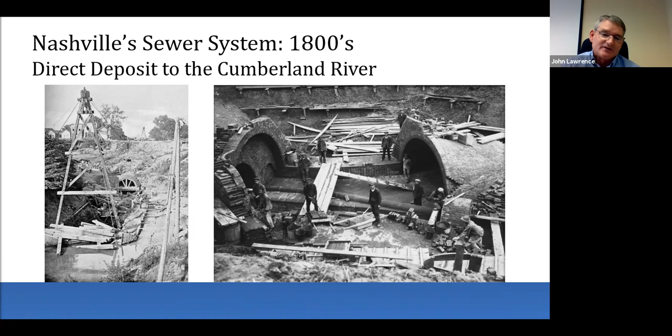Next slide, Jenn. Let's fast forward to 1948. The Federal Water Pollution Control Act was the foundation for the Clean Water Act in 1972. The authors of these acts recognized the urgency to protect our waterways and set wastewater standards across the country. That led to the National Pollutant Discharge Elimination System, which we refer to as the NPDES permit, that sets limits for the pollutants that are discharged to the waterways of the United States.

Central Water Reclamation Facility was built in 1958 and expanded several times to accommodate the growing population of Nashville. If you look around Central, you'll understand why, because there's townhouses and flats just going up all the way around the Central Reclamation Facility.

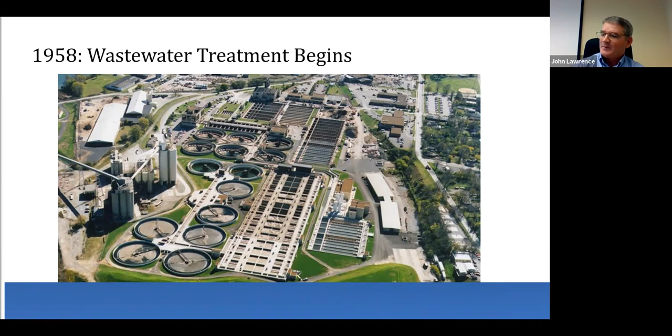Next slide, Jenn. Metro Water Services not only includes Davidson County, but also includes portions of Williamson, Wilson, Robertson, Rutherford, and Sumner counties. So you ask, how can Metro Water Services get wastewater from surrounding counties? Well, there are 118 sewer pumping stations. These lift stations are used for pumping wastewater from a lower to higher elevation. For example, we need to pump wastewater over a ridge to get it to flow by gravity to the treatment facility.

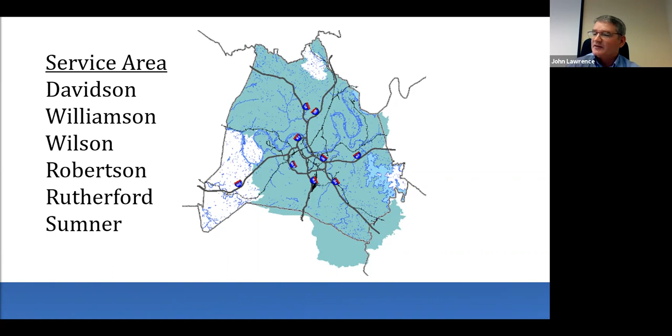Next slide, Jenn. Parts of the Metro Water Services water reclamation infrastructure include 3,100 miles of pipes, 118 sewer pumping stations, 180 million gallons per day treated, and 216,000 customers.

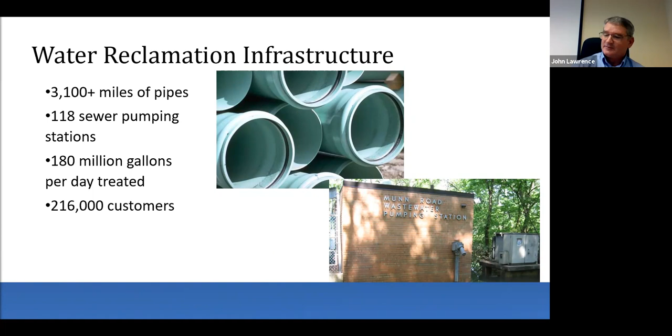Next slide, Jenn. There are 4 reclamation facilities. Central, that I mentioned, was constructed in 1958. It has an average daily flow of 125 million gallons, and the capacity is 330 million gallons a day. The Dry Creek facility here in Madison was constructed in 1961 with a 24 million gallon a day average. Whites Creek was constructed in 1976 with 37.5 million gallons a day. And the picture at the bottom is the Biosolids, or nutrient recovery facility, that was constructed in 2009.

Central and Dry Creek are currently under construction to get rid of chlorine and go to UV disinfection. Both facilities are also going to be going under headworks construction. Central is under construction now. Dry Creek will hopefully have new headworks within 5 years.

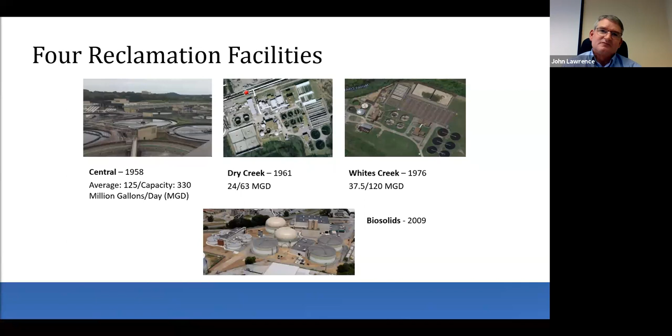Next slide, Jen. This takes us to preliminary treatment. Preliminary treatment removes grit, rags, and solids that float, which may harm the operation of the rest of the plant. Bar racks and mechanical screens remove paper, rags, and other large solids. Sand and grit are removed by gravity settling in a grit chamber.

If you look at the picture here on the left, that's an aerated grit chamber, and there's air pumped into that chamber which makes the water less dense, so the heavier grit and sand, rocks, whatever comes into the system, will settle out to the bottom. That tank is designed with conveying walls at the bottom. If you look to the back of that picture, you'll see a sprocket with some chains, and there's buckets that go along the bottom of that chamber that scoop up the grit and put it in an auger. The picture to your right shows the grit dumpster.

I like to tell a story. When we used to have tours at the facility, I would always mention that I had found a pair of earrings that were looped together, and I always joked that I put them in an envelope and gave them to my wife for her birthday. Everybody just kind of looked at me like I was crazy, but I just kept talking.

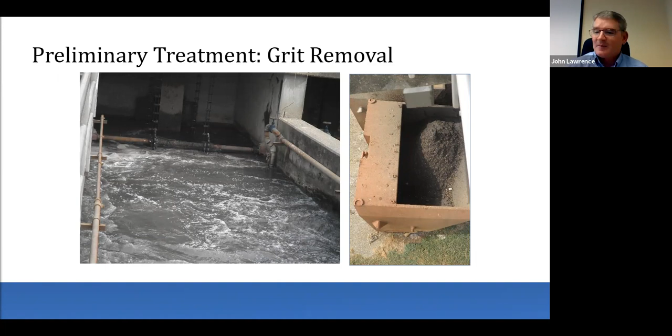That's when heavy rains come in, that's when we get most of the grit. And that grit is mixed with wood chips and taken to the landfill. Okay, next slide, please.

Following preliminary treatment, the water moves to a clarifier or settling tank. This is primary treatment. Here, under very calm conditions, sewage solids settle to the bottom of the tank. The solids at the bottom are called primary sludge. The sludge is pumped from the tank for treatment later elsewhere in the plant. What is left is a soluble food for the microorganisms in the aeration tank.

So if you look at the picture to the left, that tank is in operation. If you'll notice the scum and grease closest to us in the picture, and there's flights floating in the background—what that does is move real slow across the top and push all the grease and trash towards the trough, and that's how we skim off the solids that float.

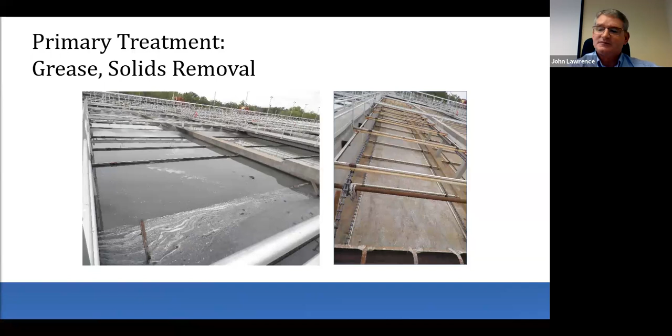Then at the bottom, if you'll notice in the tank that's dry, those same flights or scrapers will scrape that settled primary sludge to a hopper, and it's sent off to be processed at a later time. This facility is Whites Creek, and it's pumped to our nutrient recovery facility at Central. Okay, next slide, please.

Microorganisms such as bacteria and protozoa can use the small particles and dissolved organic matter not removed in primary treatment as food. Secondary or biological treatment is performed in a tank containing thousands of pounds of starved microbes called activated sludge. Like us, they require air to live. They are aerobic organisms.

Microorganisms in this aeration tank use the dissolved and particulate organic matter as food, producing more organisms. So to the left, you'll see—really can't tell it, but that's the aeration tank, and the color is what we look at. Visually, the first thing you can tell is the brown chocolate milk color. That's what you're really looking for, and that's where all the organics come in.

We call it settled sewage, and the microorganisms are breaking down the organic material that comes into the aeration. To the right, you can see an air header with diffusers, and that's how we pump air with blowers into the aeration to keep that environment aerobic.

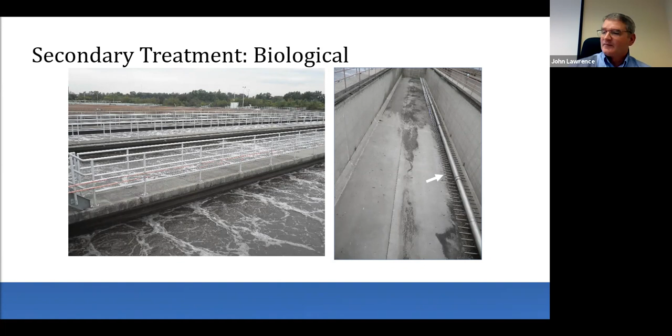We have blowers with motor horsepower ranging anywhere from 1,500 to 2,000 horsepower. So it puts out a lot of air. Next slide, please.

So how do we keep up with these microorganisms? The quickest way is microscopic examination. Although we do operational sampling, such as a 30-minute settleometer and a mixed liquor suspended solids test, that gives us an indication of the amount of bacteria we have in the facility.

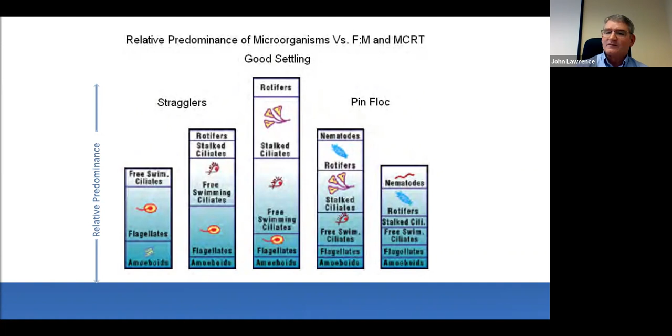As the bacteria start to break down the BOD, biochemical oxygen demand, that's the food coming in from the wastewater pumping stations. Those bacteria, as they consume that, secrete an exopolysaccharide slime layer. That helps them stick together and settle out when they go to settle, leaving clear liquid coming out of the final clarification.

Other than the organisms we're looking at, we also look at the background, the clear water, and the floc structure. You want that good popcorn looking structure, and it's good to see the rotifers. Okay, next slide please, Jen.

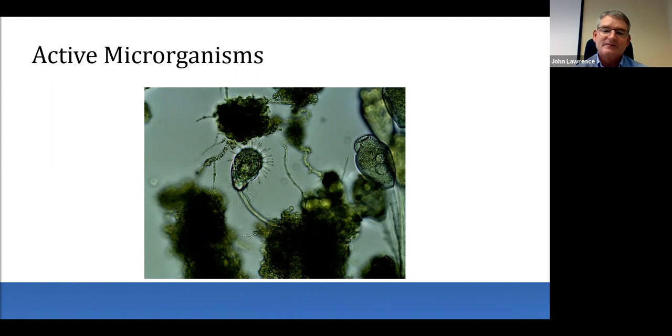They'll flick the cilia around, and it draws the organic food, and that's how they feed. The word cilia is a Latin term meaning eyelash, and when you see it under the microscope and zoom in pretty well, it does resemble an eyelash.

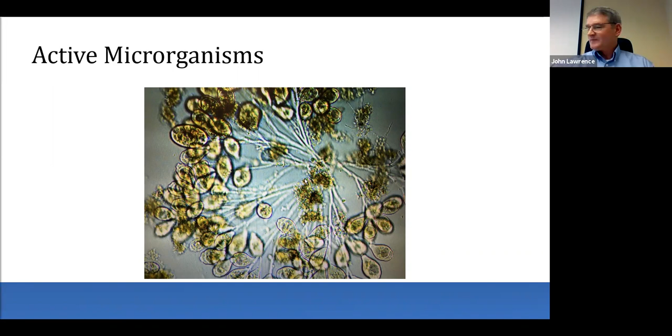Once it goes to the final clarification for settling, you'll notice how all the filaments are — it's called interfloc bridging. That increases surface area without a corresponding increase in mass. So your solids can't settle, your biomass can't settle, and it stays more towards the top, causing problems with suspended solids and making permits for suspended solids.

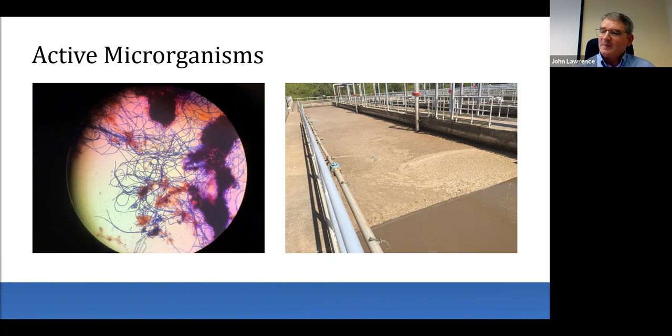The best treatment for this filament is probably chlorine, which is non-selective in what it kills. The best way is to totally get it out of the plant, either vac truck it, or skim it and get it out of your facility — that helps. If you look closer to this picture on the right, you can see what it's supposed to look like, and then the foaming later in the aeration tank. Next slide, Jen.

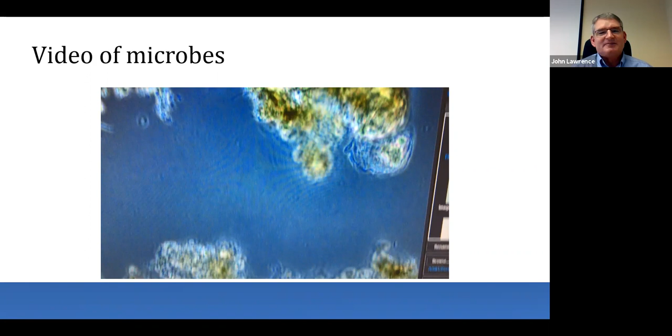What's pretty unique about the water bear — I'm sure most have heard — it's been sent to the moon. It can live in nuclear fallout. It can dry up and come back to life years later. The reason it can do this is it secretes an enzyme right before it dries up, and it's kind of like it puts itself in a balloon, and when it's rehydrated, it comes back to life. It's a higher life form, pretty interesting, and science is still studying how it's able to do that.

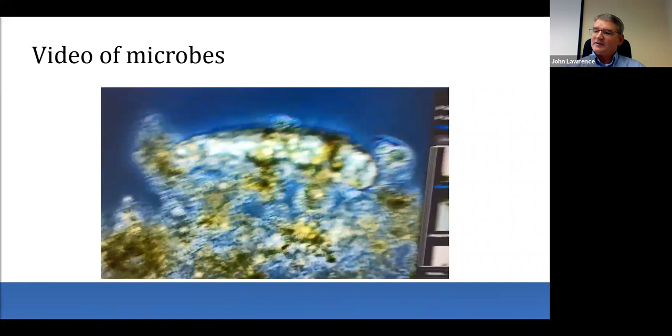So after all the bugs' hard work, we send them to rest in a final clarifier. Here, the microorganisms settle to the bottom of the clarifier and form a blanket. Some of the bugs are sent back to aeration to treat more wastewater, and some are wasted out of the system to be processed later. The clean water that flows out of the top of the clarifier is sent along for disinfection. This is our last opportunity to get the water as clear as we can get it before disinfection.

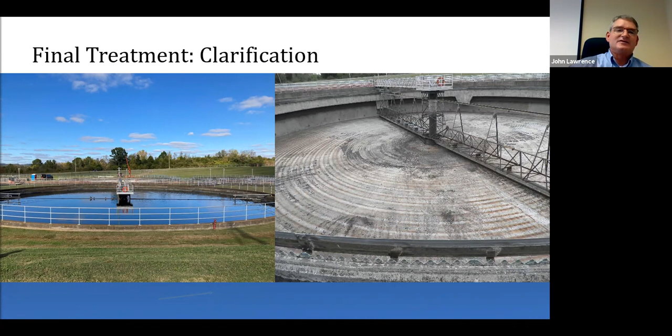The main concern about ultraviolet is you have to have the water as clear as you can get it, because if you have any solids in the water, the bacteria can hide behind that piece of solid, and the light won't penetrate to the bacteria. So you've got to really stay on top of what's going on in your plant to ensure that clear water. And how that ultraviolet irradiation works is it alters the DNA of the bacteria so they can't reproduce.

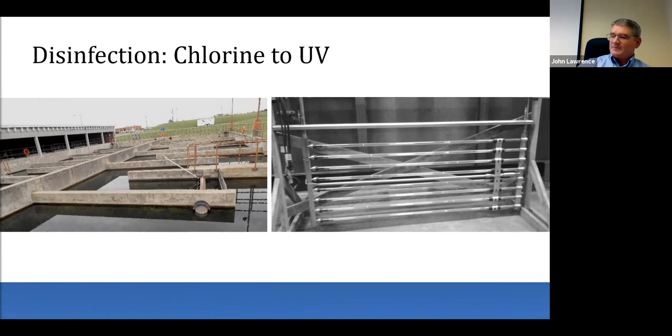So finally, we return the reclaimed water back to the Cumberland River. Our final effluent is sampled daily and sent to our state-approved laboratory to ensure we are meeting EPA discharge permit limits. The water that's sent back to the river is actually cleaner than the water in the river. If you'll notice how clear that water is, that's good operation. That's what we like to see.

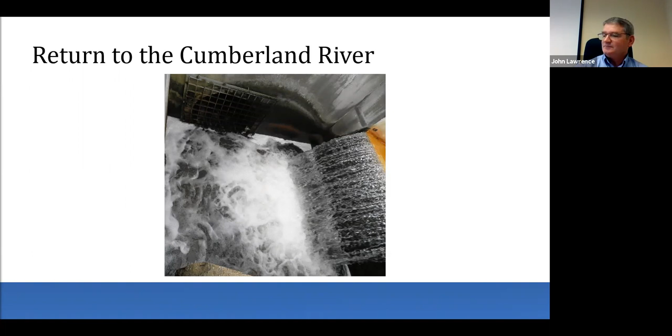So this brings us to waste removal. From 1958 to 1994, Metro used incineration as primary means of disposal. Tighter emission restrictions caused incineration to become cost prohibitive.

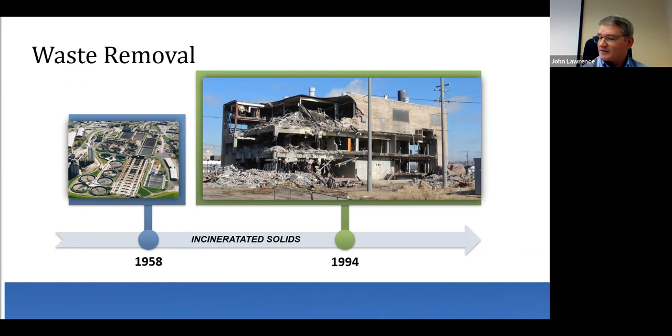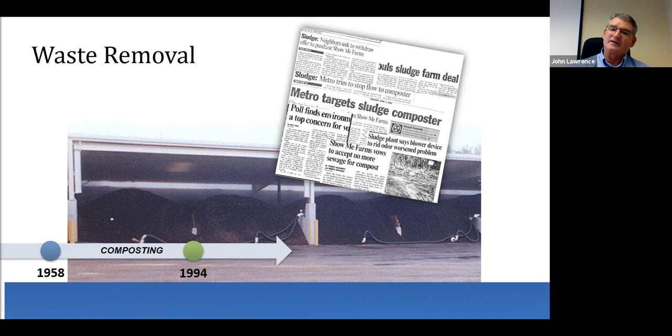So in 1994, Metro Water Services began hauling to landfills. Dewatered raw sludge was sent to 6 different landfills in 3 states. In 2006, we were sending 100 truckloads per week and driving over 20,000 miles to the landfill to bury a sustainable resource.

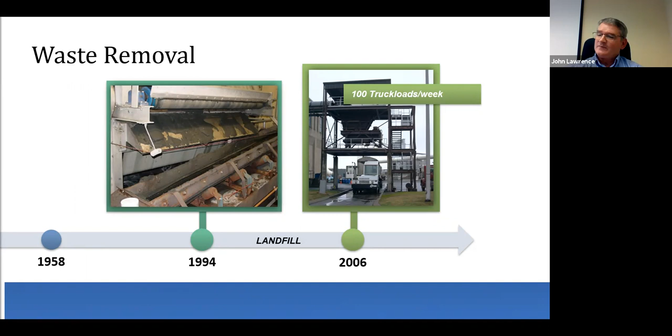And that brings us to the nutrient reclamation and being a good neighbor. So what did we do?

In 2001, Metro Water Service began a study to evaluate a long-term solution to the solids and odor problems. Odors were a big problem in the area, and the neighborhood was growing.

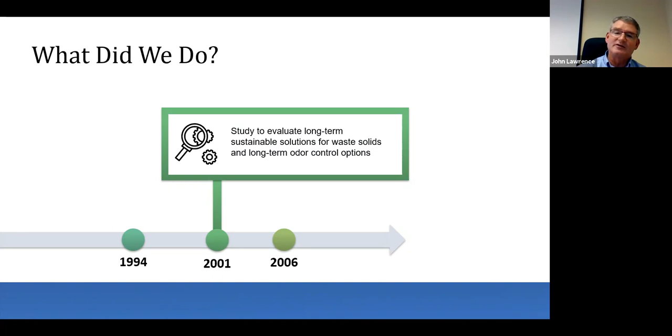So the solution was to build a nutrient recovery facility and add odor control to Central Water Reclamation Facility, the present nutrient recovery facility. It went into service in 2009 and has been operating since. The cost of the facility was around $130 million.

Metro Water Services recognized the growing concern with limited landfill space, and it was an environmentally clear choice not to waste a valuable resource. The Biosolids facility receives the excess organic matter from the Whites Creek and Central Water Reclamation Facility.

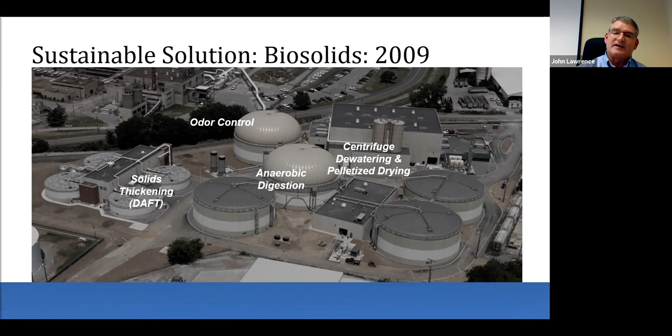So we have removed solids at various points in the wastewater treatment process: primary sludge collected in the primary clarifier, and waste activated sludge from the secondary clarifier. Organic material is mostly water, so we have to dewater the solids so it doesn't take up space in the digester. So this is the first dewatering process.

There's a polymer mixture with compressed air, and it's kind of like shaking a Coke can or Coke bottle, and you'll get that fizzing effect. And what that does is it floats those solids to the top.

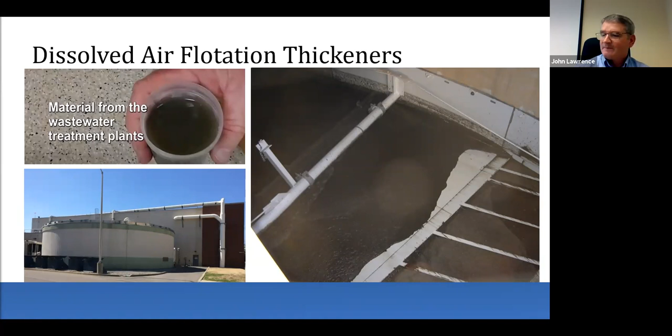Next step in the process is anaerobic digestion. Here, the organic material is pumped to the digesters and broken down by anaerobic bacteria that use the organic matter as food, producing methane and carbon dioxide.

The main bacteria are acetogenic, methanogenic. The organic material is mixed and kept heated to around 95 to 98 degrees for 15 to 17 days.

Anaerobic digesters are similar to your stomach. Some may have heard that statement, but it is. You've got to really watch how you feed the digesters, because if you underfeed them, you'll get an upset digester.

And then if you overfeed them, it's the same. It's just like your stomach. If you go for days without eating, you're gonna get sick, and vice versa - if you eat too much, you'll make yourself sick.

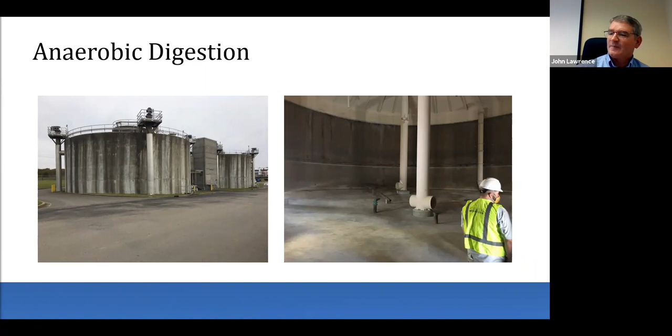During the time in the digester, there's a lot of methane produced, so we capture that methane to help heat the organic material in the digesters and for use in other equipment. We capture this digester gas in this bubble.

A lot of people say it looks like the Jiffy popcorn container, but that's actually a lid inside of a lid, and there's forced air pumped in to keep the lids from touching each other. The lid holds about 500,000 cubic feet of digester gas, and that's what we use to power some of the equipment in the facility.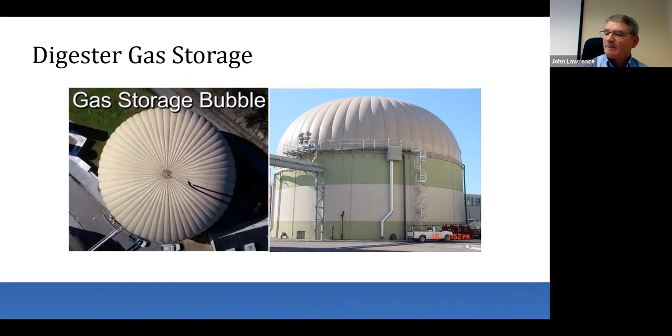There's so much methane produced that we have to flare the excess not captured and used for equipment and operations. About 1 million cubic feet of digester gas is flared every day at the Biosolids facility. You'll see the flare stack to the left - that's an enclosed flare. That's a good flare to keep the temperature regulated to burn off the volatile organic compounds.

The methane - this flare to the right is the one we have here at the Dry Creek facility. It's just an open flare, and it just constantly burns. The flare temperature on the left there at the Biosolids facility can reach up to 1,400 degrees. The one here at Dry Creek facility, maybe 800 to 1,000. So that's just the difference in the flares, and that's just the excess methane that we don't capture and reuse.

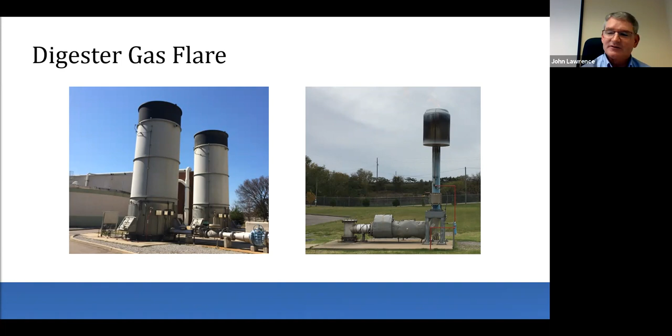After the anaerobic digestion process has stabilized organic matter, it's pumped to these centrifuges and mixed with a polymer mixture to help dewater the organic material. The reclaimed water is sent back to the treatment facility to undergo further treatment.

So how these centrifuges work is it has a bowl and a scroll. It's exactly the way your clothes washing machine works in the spin cycle. So as it's spinning at about 2,500 RPMs, that's revolutions per minute, it's actually throwing the water out to the side, and the solids are scrolled out of the centrifuge itself.

If you'll notice, the percent solids coming into the centrifuge is around 3%. So that's the second dewatering process. And when it comes out of the centrifuge, this is what we call the cake in this bowl, that's anywhere from 20 to 30%. So we've reclaimed that water from the solids from the digester and sent it back for further treatment at the reclamation facility.

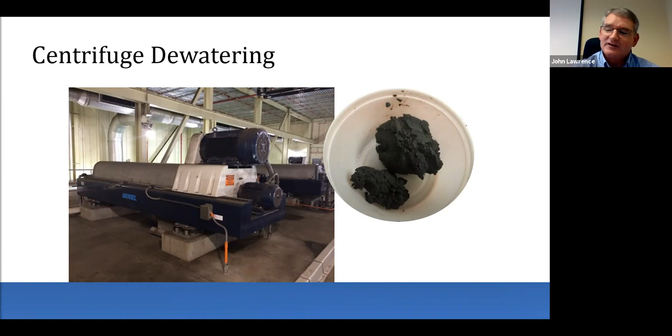The cake is then mixed with a seed pellet and placed into a drum dryer with temperatures that exceed 1,000 degrees Fahrenheit to kill all remaining pathogens. This process helps form the pellets and produce a Class A exceptional quality product. The EPA has set temperature requirements and how long the organic material is exposed to heat.

So if you look at this picture to the left, that's one of our drum dryers. The inlet temperature will be in the back of that drum, and that's where the organic matter is dumped into that drum, and it's heated. That drum's a 3-pass system. It's sort of like your clothes dryer. It has fins in it, and that keeps the organic material or the pellets moving towards this tube here. That's the outlet, and the outlet temperature on that drum is around 200 degrees.

After these pellets are sorted and they come out into a uniform size, they're stored in this picture to the right, that's one of our silos. Like I said, they'll go through a shaker, it's 1 to 4 millimeters. That size is best for the spreading equipment for our farmers to spread on their fields. And how these trucks are loaded, they just pull right underneath that silo and then fill the trucks, and away they go to spread that on farmland.

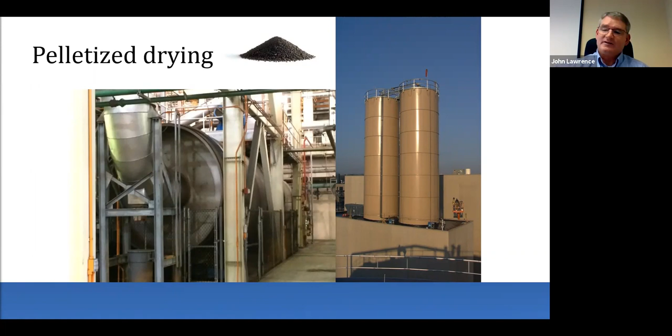As mentioned earlier, the EPA has rules and strict regulations that govern biosolids land application and testing for different parameters. Metro Water Services Analytical and Research Laboratory tests for these parameters on a monthly basis. So these are all part of the 503 regulations. If you want to have some good reading, you can go on the EPA website and pull up these 503 regulations. It covers a little bit of everything: pH, volatile solids, the NPKs, the nitrogen, the phosphorus, and the potassium that makes up the pellets, the organics in it.

And then it also touches on the pathogens and vector attraction reduction. And what that is, it has to be stabilized so flies and rats and raccoons won't carry the organic material off site. And if you look at the bottom, the Class A exceptional quality exceeds all pathogen and vector attraction reduction, and that's what our Music City Gold's made of.

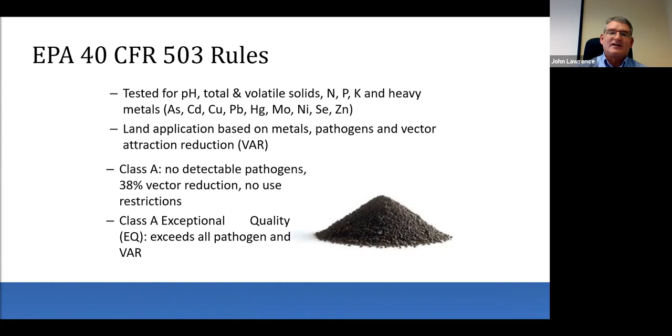We have a guy here at work that brags on his yard that his neighbors want to know the secret of how his yard stays so green. I think he's still mowing his grass right now.

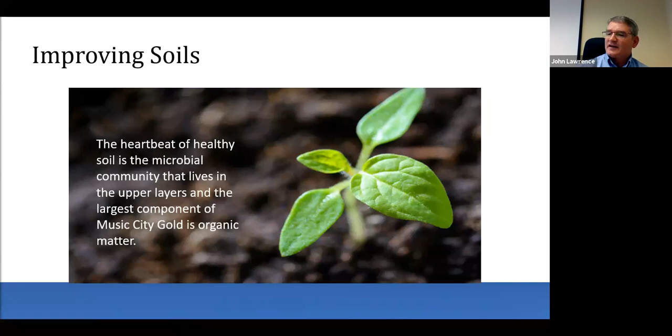There are odors produced in the process of water reclamation. That's why Metro Water Services invested in a bio-odor control system that captures odors from different areas of the facility. These odors are pulled through a concrete chamber that contains media for bacteria to grow. Here, microbes metabolize the air constituents and convert them to harmless reaction products such as carbon dioxide and water. This biofilter must be kept moist for bacteria to grow.

This biofilter here is at the central reclamation facility. If you look in the background, you'll see the buildings in downtown Nashville. So this is just another way of being a good neighbor. I mentioned how houses, apartments, and things like that are going up around the central reclamation facility, and we're just trying to keep the odor complaints down.

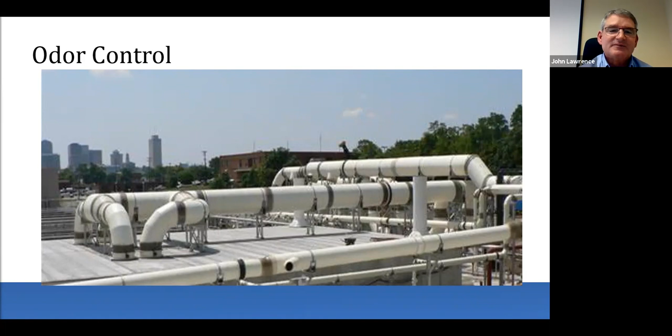So it does a good job and keeps our neighbors happy.

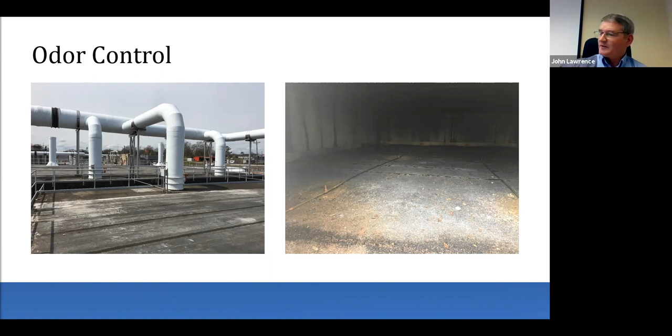Some of the benefits: we've had $1 million in natural gas savings. We produced 18,500 tons of beneficial reuse product. We save $4 million a year in disposal costs. We reuse 309 million cubic feet of digester gas. We're producing Music City Gold at a 550 NPK, and the annual cost to landfill since October 2018 has been $0.

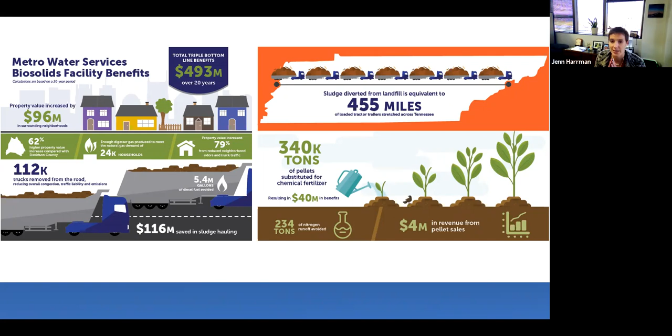All right, thank you so much, John. This has been incredible information. There's just a lot going on in the water reclamation process and biosolids process that Metro Water Services does. It's incredible to see that we're moving to UV disinfection, which makes this entire process essentially a natural process without the use of chemicals. It's really a neat process. I find it fascinating, I hope everybody did as well.